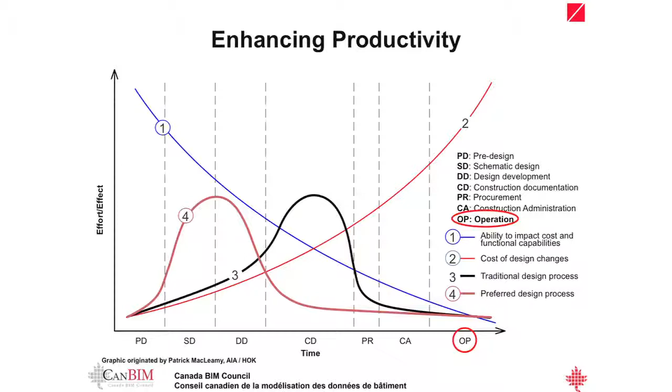The chart I'm about to show you is one which I'm sure many of you have seen time and time again, and it's something that's provided by Autodesk in their promotional material, and it's a handy little thing because it does explain very succinctly how working with BIM, for example, can organize your information flow and realize real efficiencies in the design and implementation process.

And that last curve represents an optimal achievement in terms of the design information availability and when that design information is going to make the biggest difference to you as a designer and as a project manager, for that matter, in controlling your costs going through the design process.

Zeidler was an early adopter of Revit, and we used the product probably as early as 2002, 2003, but mainly as a design enhancement tool. We weren't taking projects from beginning to end using that software, and we were just gaining an appreciation of its power.

Prior to embarking on the Bow, we had made the decision to implement Revit throughout our offices worldwide, and we had implemented that strategy in about 2004, and we had agreed intra-office that we would each select a large, fairly complex project within each office, and do it from beginning to end with Revit, and try and engage as many of our sub-consultants in that process as we could.

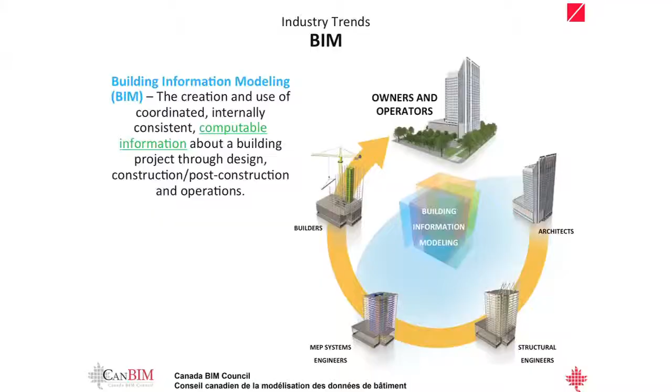So when we started in 2005, it was just before Christmas, we had a client, Encana Corporation, and a project manager that they had hired to assist them as the owner by the name of Matthews Development. And then they proceeded to hire the team to do the project. And Foster and ourselves were thrown together, in a marriage which has turned out to be a very rewarding and very, very enjoyable experience. And the project began.

Obviously, we needed to get to an early stage design. Foster was working in MicroStation, which is a Bentley product. We were working in Revit. They don't talk, and so consequently, we were redrawing everything and re-inputting everything that Foster was delivering to us. And so it became apparent to us all that our integrated design approach had to be truly that. We had to be joined at the hip from the very beginning of the project.

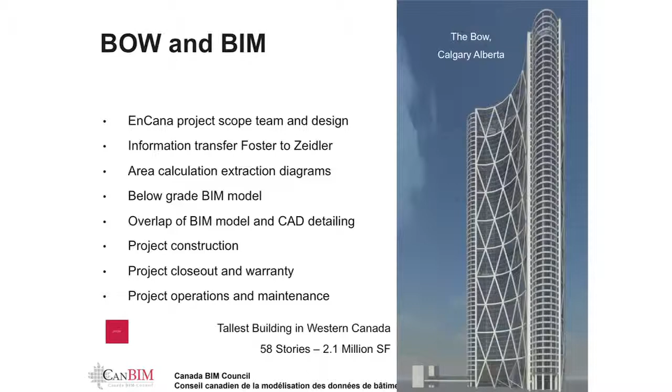One of the most important things that we had to do at the very outset, of course, was to establish that we could build a building large enough for Encana, and so that was one of the things we needed to move towards very quickly, a footprint and configuration that would give them all of the attributes of a building that they wanted, which was many, many floor plates of cellular offices, very little open plan.

And so we started to do area calculations and extract that data from our early design schemes in order to confirm and convince Encana that they were going to get what they needed.

We then had a team of sub-consultants, and as it turned out, none of them had adopted Revit. And so we were dealing with a design consultant that wasn't working in a 3D package that we were working in, and all of our sub-consultants hadn't yet adopted Revit. And so it was beginning to be a bit of a challenge to integrate all the information in both Revit and in AutoCAD.

So to begin with, I don't know, this thing seems to be running away with me. Does anybody know why? Huh. Maybe it'll stay put.

So we had an owner eventually. Encana was the original owner occupier. They weren't familiar with BIM. The eventual owner, H&R REIT, wasn't familiar with BIM at the outset, and Cenovus, who became another principal tenant of the building, was not either. And Matthews Development, the project manager, was not as well.

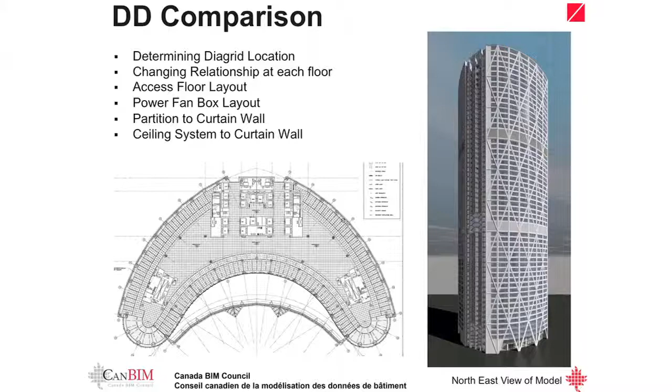The next thing was that we couldn't stop construction, so we were moving forward into completion of the excavation, development of the anchor pad, which was a 3-meter slab of concrete at the base of the excavation. And we had to continue to advise our steel fabricators about the areas of their contract that they could move forward with while we were rebuilding the model.

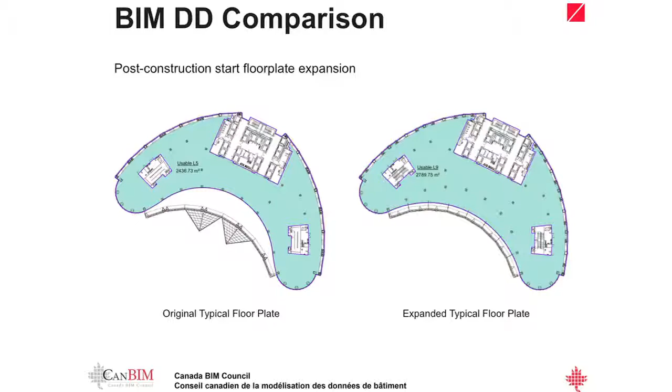Now, all of these various aspects of the building were changing, and you can see by this small diagram that what had been an atrium space between the outer skin of glass and the interior of the blue line, the arced line, became this condition here. So the owner had recaptured all of that space within that arc.

And so we had to revisit all of the decisions that had been made with respect to the diagrid, which is the external structural frame, all of the relationships that were established with the vertical transportation, because we had different head counts, different populations on every floor. We had a raised floor throughout the building, all of which was now being dragged towards the new window wall.

We had to completely recalculate and redistribute all of the air distribution systems, and the partition systems and the ceiling system. So this was a major change, and we had to continue construction.

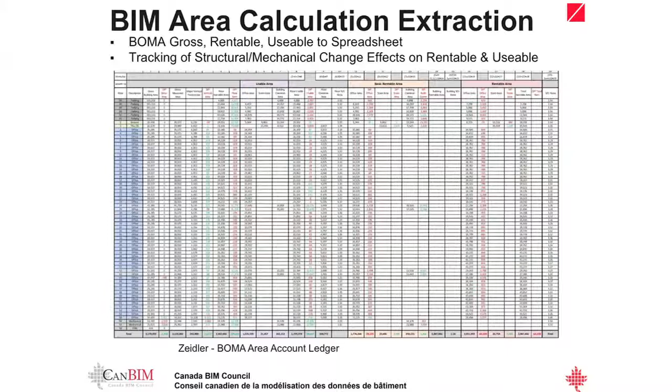So to continue with this list of BIM impacts, we were then getting our structural frame above grade, and shortly after that, Encana and Cenovus decided that they were going to become separate corporations. And so that meant that we now had two head offices within a single structure, and all of the interior space planning that we had done to accommodate a single corporate entity now became two entities, each with different cultures and each with different demands.

And again, the BIM came to our rescue because we were able to completely reconfigure the interior design within a space of time that enabled us to serve the owners and the tenants' interests. But all of this happening on what was otherwise a very tight schedule. Now, Gensler was now moving into a stage where they were starting to work in Revit as well, so that helped us quite a lot.

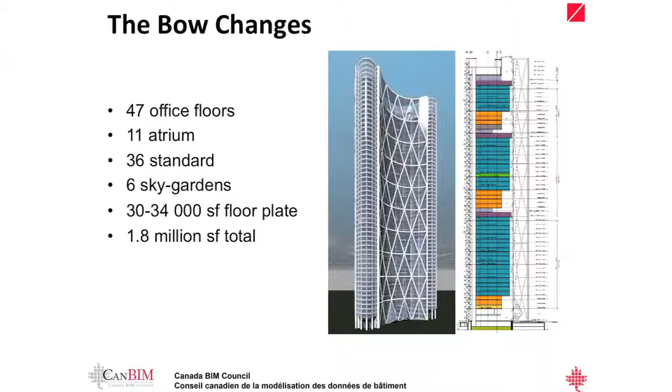Now, how does that change the building section? It meant that what had been continuous atria spaces behind the outer glass were filled in to the window wall, and we were left with six-story atrium spaces at intervals in the building, where we had continuous atria up the entire building, interrupted only by those purple fat floors there and there and there.

You can imagine that the concept of our atriums was such that we were going to have convection air currents up through the building, collecting warm air and distributing it across the building at the fat floor levels, and distributing the warm air down the north side of the building to temper the office conditions on that side. So that was the strategy going into the project.

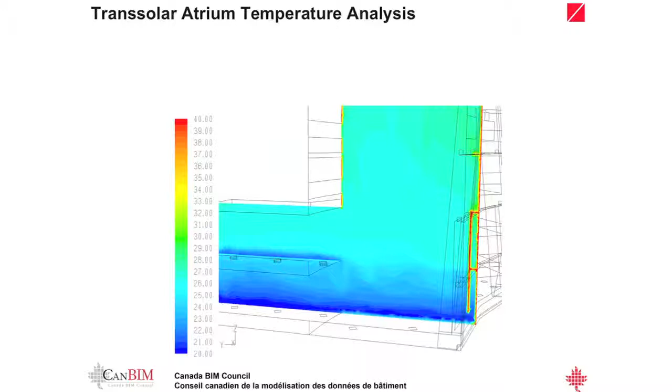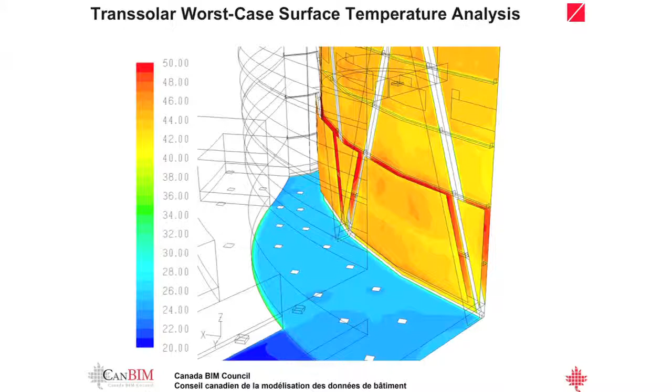We then had to bring Transsolar back to completely redevelop the interior air movement patterns that we had originally established as the basis for calculating our air handling capacities. And so they did a complete reanalysis of the temperature within our atria, and then that fed back into the recalculation of the motor sizes and the fan capacities and so forth. So again, one of those situations that goes right back to the very root of our basic assumptions.

And then, of course, in a fairly early stage in that process, we had to completely recalculate all of the area requirements and determine very quickly that this was a feasible thing to do, and convince the new owner that in fact this was going to result in significant benefit financially. And again, working with Revit, we were able to pull off those revised area calculations very, very quickly.

So at this stage in the project, just as we're getting the structure out of the ground, we've already revised the building twice in a very significant way, and we have had some pretty surprising turnaround times using Revit as our principal vehicle for making those changes. Now, it did have an impact on the schedule. We probably lost about a year and a half in the schedule because of those changes. But it could have been much, much worse.

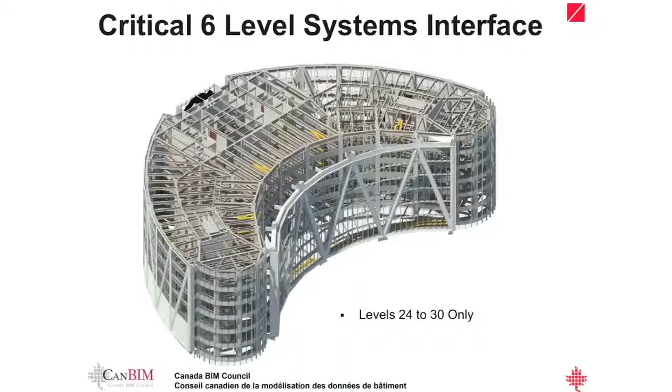So in order to pick up on that schedule, we had to standardize the building, and we used a structural model that, if you have any questions about it, Blaine can probably answer, because he was associated with Barry Charnish and the Yolles team at the time, and so we built the model so that we would be reassuring ourselves at every point that we were achieving clash detection with our mechanical systems.

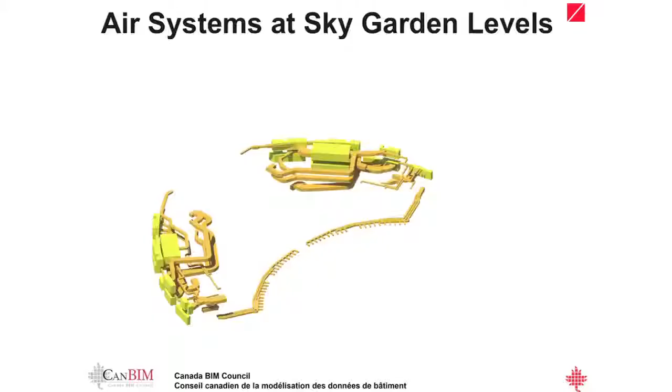And we had to do the population of the model with mechanical and electrical, because our MEP group weren't working in any three-dimensional software at all. And so that was a task that we undertook, to isolate those elements and to ensure that the structure and all the other architectural aspects were fitting in comfortably.

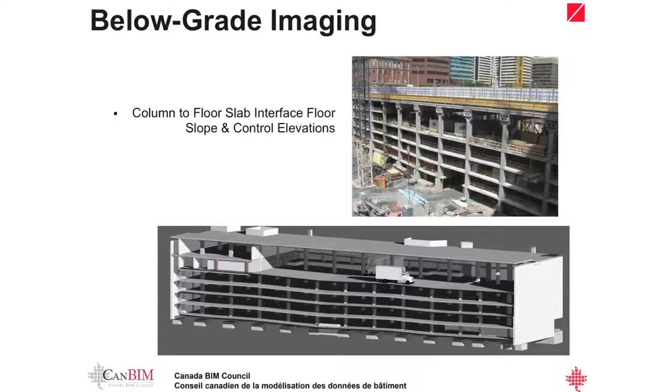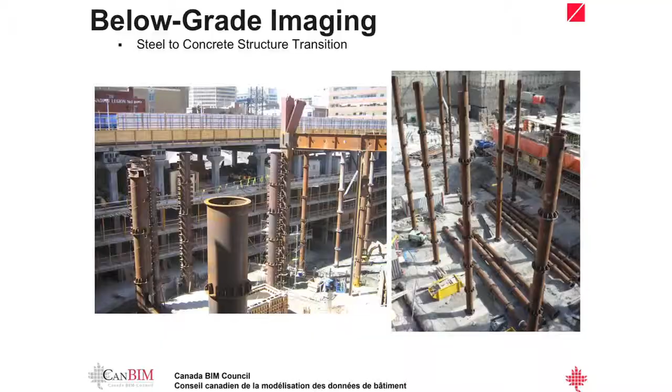And then we had to revisit the lower level of the project, even though we had committed to a structural approach which had 6-story high columns, where we were able to achieve a grade relationship on the site long before we were able to actually create the parking structure below it. And that was a real benefit to us.

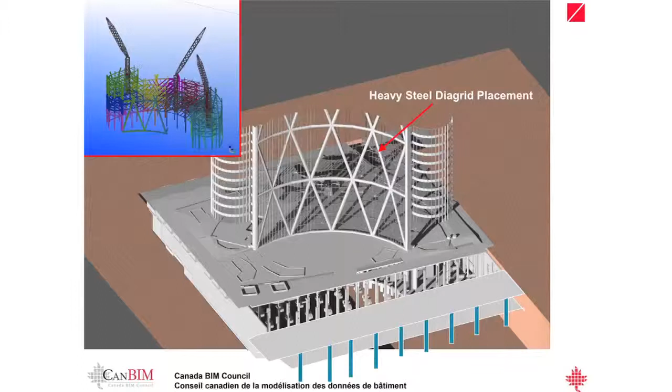And the other thing that we were able to do very quickly was to revise access and egress from the parking structure and the logistical center that was located below 6th Avenue, and reconfigure all the ramps to correspond to new conditions that had arisen because of both the structural changes and the corporate changes that were occurring. And once we were able to do that, we could re-embark on the manufacture and the placement of the heavy steel diagrid sections that faced the Southwest Plaza.

Now, again, we were using the BIM models very, very extensively in order to study all of the conditions that we were encountering with the double curtain wall and the influence of the wind loading that was creating a requirement to provide these very, very complex structural elements, which we call drag struts, that prevented the exterior structure from peeling away from the interior structure in high wind conditions and so forth.

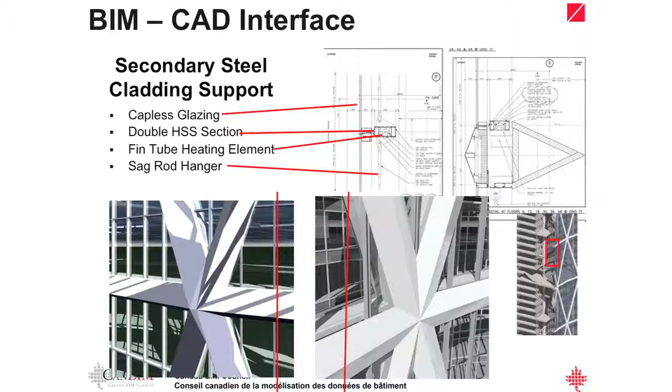And you can see the portion of the building that we were studying is right here at that junction between the outer skin and the inner wall. Thanks.

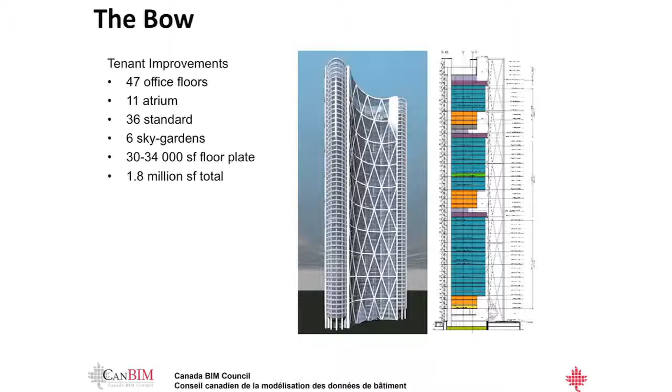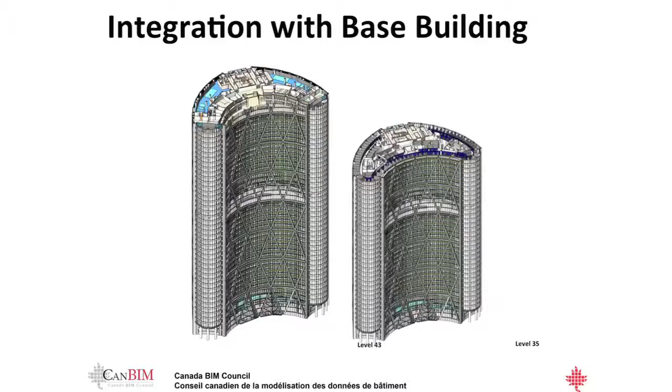Getting into the tenant improvement side of the exercise, we, as I said, had to now create 2 head offices within the single structure. And we had to completely redesign the offices of Cenovus in order to satisfy their new corporate culture. And that worked out quite well, and the model helped us very much, because as you can appreciate with the diagrid, it's a very dynamic element that affects every office space within the building that encounters the diagrid.

And so we were able to take every office and determine what impact the diagrid would have on it, and satisfy the clients in a very rapid way that every office that did have a diagrid element in it was going to be satisfactory in terms of how it would be furnished and the amount of natural light that would be received within it.

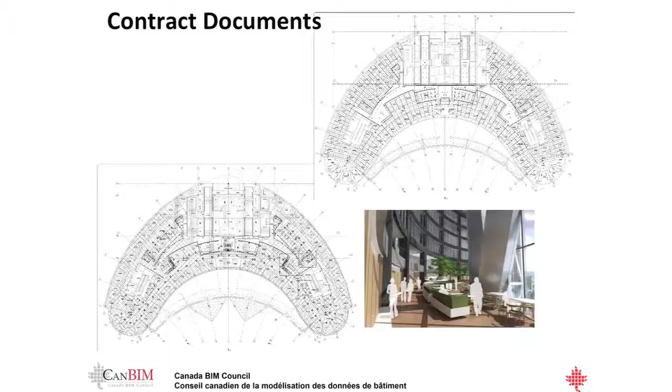Now, as I said, Encana is a corporate culture that requires that all of their senior staff have cellular offices. So that was something that drove the entire plan of their floors, whereas Cenovus wanted to do all of their floors in an open plan. So we had to completely reconfigure and revise how the air handling systems and the partition systems worked for each of them.

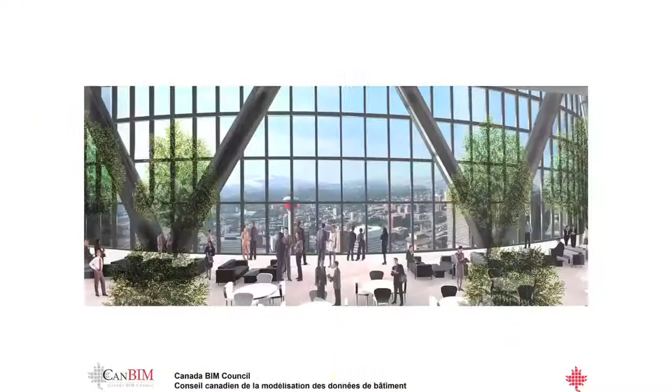Now, what results is these large atrium spaces that provide a wonderful panoramic view of the mountains and enable us to do extensive planting within those atrium spaces and create a work environment which has, for each of these major corporations, something akin to a village square, where the vertical transportation, the express elevators, bring the staff to these village square levels. We call them sky gardens.

And then from those village squares, the staff move up into their neighborhood business units or office areas. And so these sky garden floors become the place where coffees are sort of picked up in the morning on the way to work, and you get your copying done on the way to your office, and you meet your friends and colleagues, and then you continue with your day. And the same event occurs at lunchtime and in the evening. So the sky garden floors become very key to the entire sort of cultural and working experience.

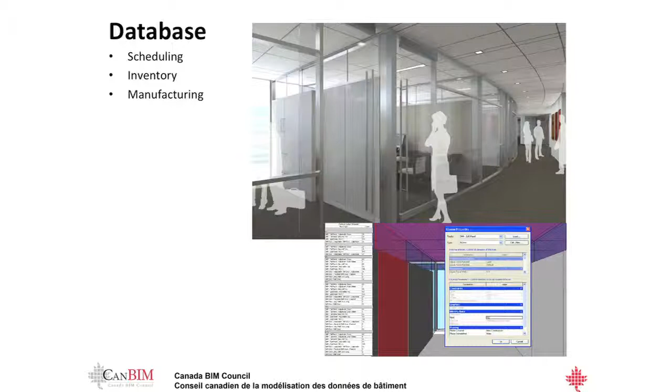Now, as far as the fit out of the office levels, we were working with Teknion and working with their inventory system and their manufacturing schedules to ensure that we were going to be able to meet the deadlines for each of the corporations. And we were able to integrate Teknion's inventory system with the BIM inventory that we were developing.

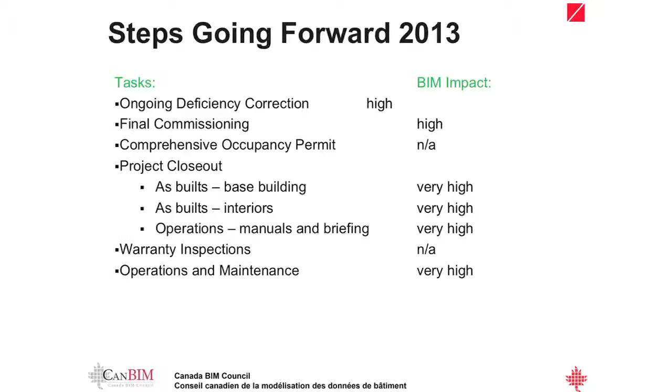So now we have pretty much filled the building up to about the 44th floor, and we're continuing with the completion of those floors above that. But what we're discovering going forward is that the owners and the project managers and the constructor have not, in the 7 years that we've been working on this project, adopted Revit or any other three-dimensional software.

And so now that we're approaching that particularly critical moment of project closeout, we really don't have anyone to receive the model in its final form, despite the fact that we've been actually updating the model throughout the entire process. So it's a bit frustrating, because we actually feel that in many respects, despite the gaps in the model that are within the sub-consultants' areas, this model could be very useful for building operations.

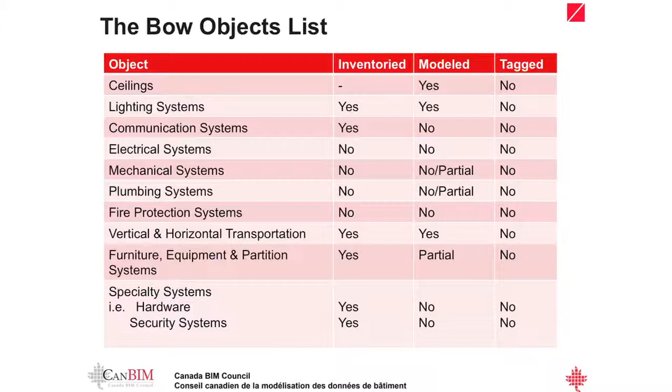But there's a lack of interest on the part of the building operations people, because they still continue to be completely unfamiliar with the potential of the model that's been created. So nonetheless, we have continued to move forward, defining those objects that have or partially have been modeled, and yet for a lot of those very important objects or components, we haven't had any tagging done.

So these are the areas in which we've been able to achieve the model, and so we have got obviously the architecture and the interiors covered. We have nothing from the standpoint of mechanical, electrical, or plumbing systems, and structural by the end of the project had caught up with their Revit input and been able to do things like clash detection and so forth in the coordination stages.

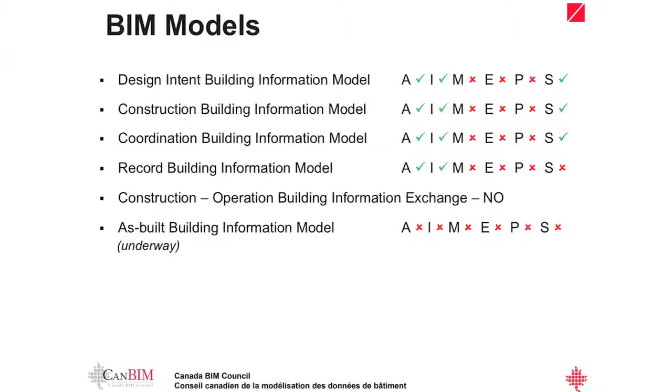However, the experience has been fantastic for us, and now we're trying to revisit this whole issue with H&R, who are the owners and the operators. And they're a very lean organization, and despite the fact that they have a huge portfolio of assets, they still don't see the need to move into this new realm of management technology.

But we're working on them, and I think that it's mainly, as Tony pointed out, that cost aspect which is probably going to move them towards a positive decision with respect to engaging more fully in this. Because we have a hunch that because they're using a very, very traditional form of property management for all of their facilities, they're losing millions of dollars a year.

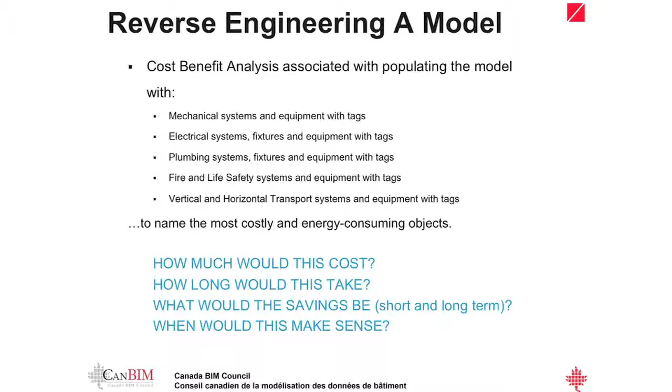Now, what I'd like to know from some of you who may have experienced this is, how do you reverse engineer this model to accommodate all of the information that's missing? And how much would this exercise cost? Does anybody have any experience with respect to estimating that? What would the likely period of time be to do a re-engineering job for mechanical, electrical, and plumbing? And it's very difficult to determine what their savings would be.

Now, we have a similar situation arising and giving us a real opportunity to take some of the lessons learned and some of the experiences that we've had and apply them in a subsequent project, which is our Calgary City Centre project down in Eau Claire. And we're hoping that the lessons learned are things that Cadillac Fairview, who are our client and building operator, can put to their use. So this is what we look forward to with them going forward in that 2-tower project, which is probably about 1.5 million square feet.